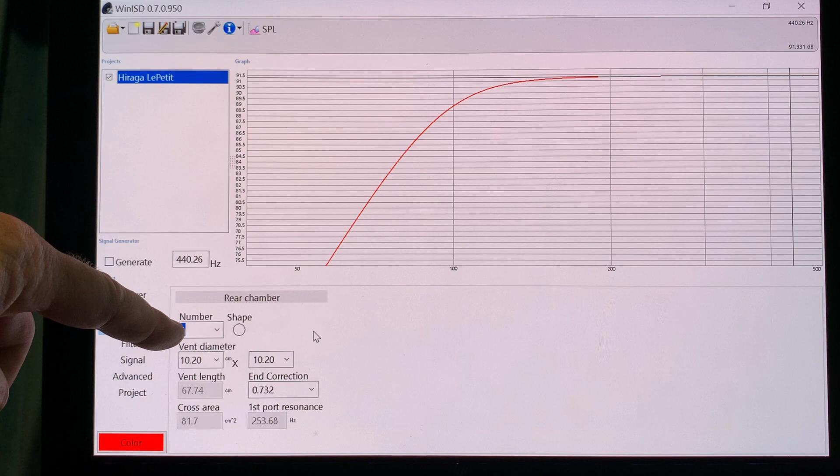Now, continuing, when you click on the Vents tab, here it tells you about the port. So you can give number of ports, so we have one port on the loudspeaker, but you can give 2, 3, 4 ports, and it will calculate the tuning frequency based on the number, shape, and size of the ports. So shape, we can change between square shape and round shape. If it's square shape, then you can design a slot port. It doesn't need to be a square. Much better if you flatten the square so it's a slot.

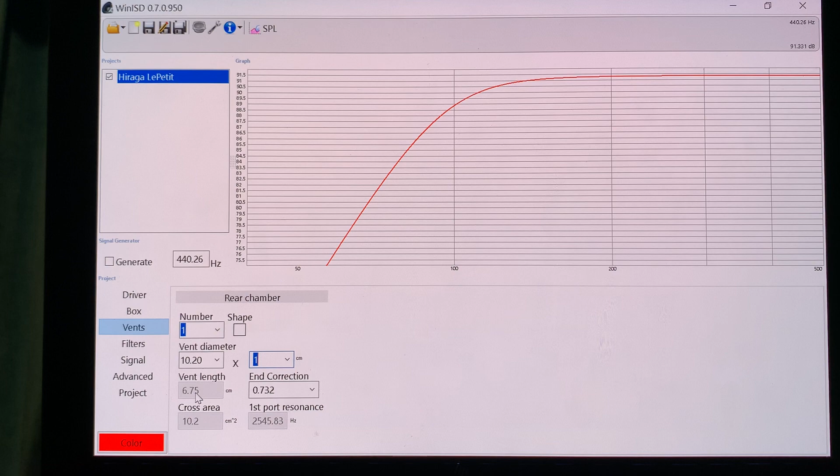And then you can design the slot by, let's say, 10 centimeters by 1 centimeter. And then if you have this big port, 10 by 1, then you need a 6.75 centimeter long port to have this type of tuning frequency. Let's go back to the box itself. So 4 liters, 89 Hertz tuning frequency.

So what happens with the output? That's at about 91 dB. If you click there, then it will show you what is the frequency. You can read the frequency there, 134 Hertz, and the output there is 90.916 dB. So we are dropping from 91.331 dB at 440 Hertz. So from there, we did a little dropping, and then it drops quite a bit more. So at 100 Hertz, we are already down to 88.8 dB.

So as you see, as we are getting closer to the tuning frequency, we are dropping more and more. Sometimes there's a glitch in WinISD, because this is the beta version of the software, and when this happens, you don't get the right frequency and dB values. It's just minus 0.9 Hertz and minus 1 dB, relative values compared to the previous position. It's kind of annoying, but it's very easy to fix. You just choose a different window, and then go back to the SPL tab, and now it's fixed. So there are some minor glitches. That's the price you pay, because this is just the free beta version.

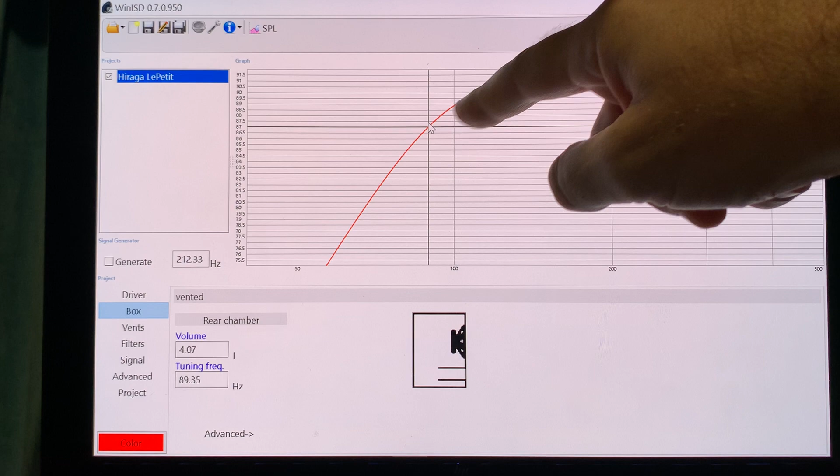So basically, when we look at 89 Hertz, it's 87 dB. So actually this is a little bit more than 3 dB loss, so the modeling doesn't give us exactly the minus 3 dB point, but something roughly that you can expect, and it can vary a little bit.

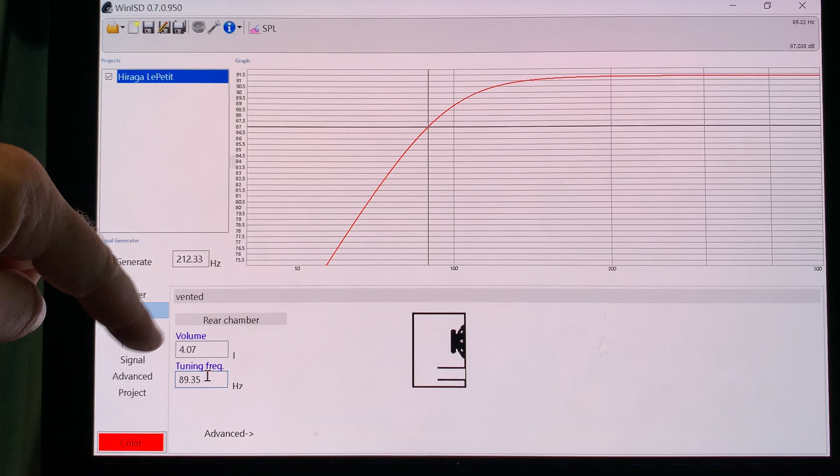So what if we change the tuning frequency? We can manually adjust here either the cabinet size, which is the free air volume. It's not the outside measurements of a cabinet. You have to take out all of the space that the wall itself occupies. That does not count into the volume. So the volume has to be the inside of the cabinet.

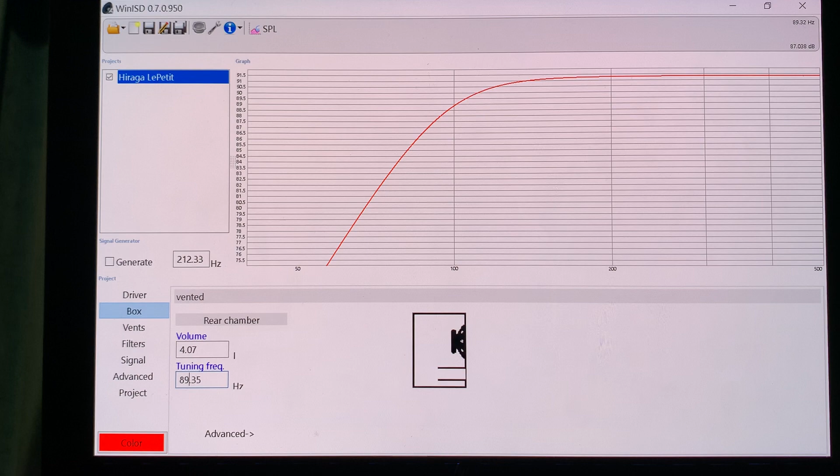That's the cats playing. And the tuning frequency, let's see if we change it from 90 Hertz down to 80 Hertz. How does it change? Then you see that it starts dropping sooner. But we cannot really see too much, can we? So let's just go back to 89 Hertz and make a copy from this. You can do copy project, and now it says copy.

And this copy, let's give it a different color. Let's make it blue. Okay. So now let's change the tuning frequency to 80 Hertz, and you see now that the blue line starts dropping earlier, but there's a point here. Let's click on it. And it's at 88 Hertz, where it starts to be on top of the red line.

So basically, if you have the same free air volume cabinet and you tune it to a lower frequency, it means that in the deeper bass you are going to get higher output for the low frequencies, but in the mid bass you are going to get a compromise. You are going to get lower output compared to the higher port tuning. And that's because of laws of physics.

Your driver puts out the same amount of energy regardless of where the port is tuned. The port tuning will change where that energy will be released, at which frequencies. So basically, if you tune the port to a higher frequency, then you will divert the energy towards the mid bass, and if you push the port tuning frequency lower, then you will divert the energy to the deep bass. So that's how the port tuning frequency choice weighs on you.

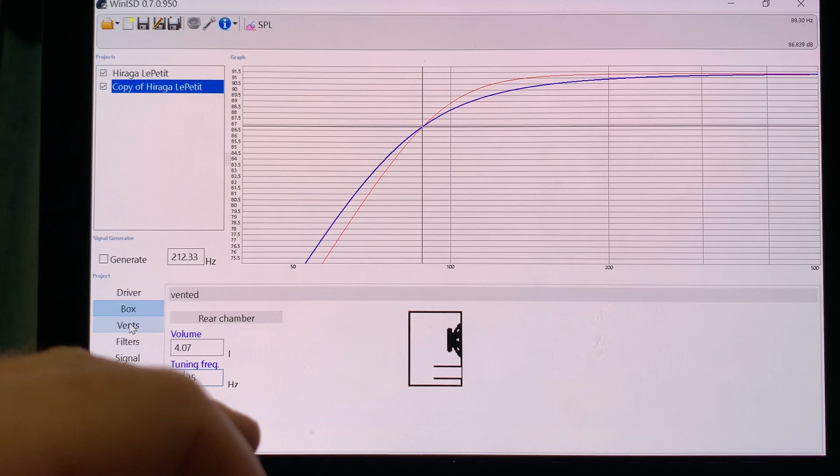And what else is going on? So now we tuned it almost 10 Hertz lower. What is the difference? Let's look at the vent, at the port. So you see now for that lower tuning frequency, we need a roughly 9 centimeter long port. And with the higher tuning version, we need a 6.75 centimeter long port. So as you see, the deeper you tune the cabinet, the longer port you need to achieve it.

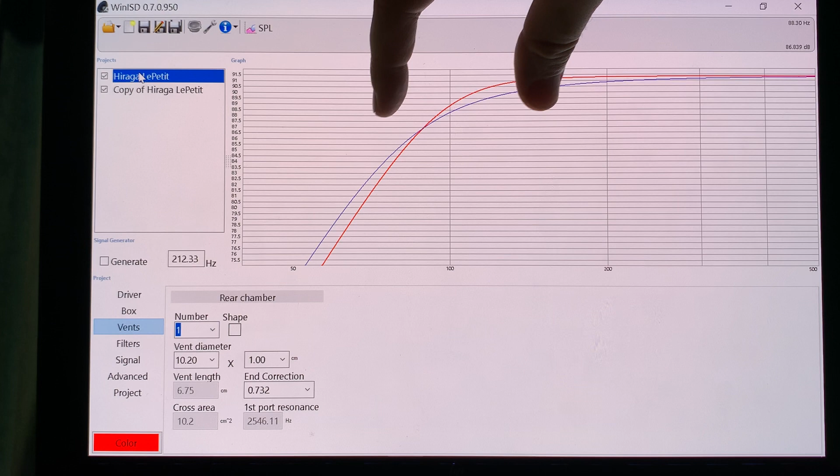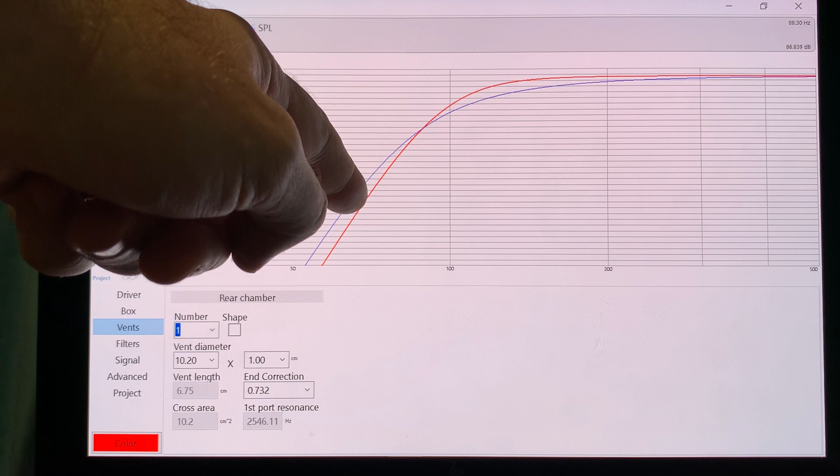However, what you have seen is that we have lost quite a bit from the mid. This is the mid bass, this region, and this is the upper bass. So top of the mid bass, upper bass, a little bit lossy. And really, we are not getting that much deep frequencies either. The whole thing just rolls off, and here it's a little bit less roll off than there, but not really enough to make a really big difference.

So what can we do about it if we want these tiny drivers to give us bass? Because right now, let's have a look at this point. So both of these drivers, when we look at 500 Hertz, it's a nice place to reference the loudspeaker output. We are getting almost 91, here you can watch, 91.3 dB output.

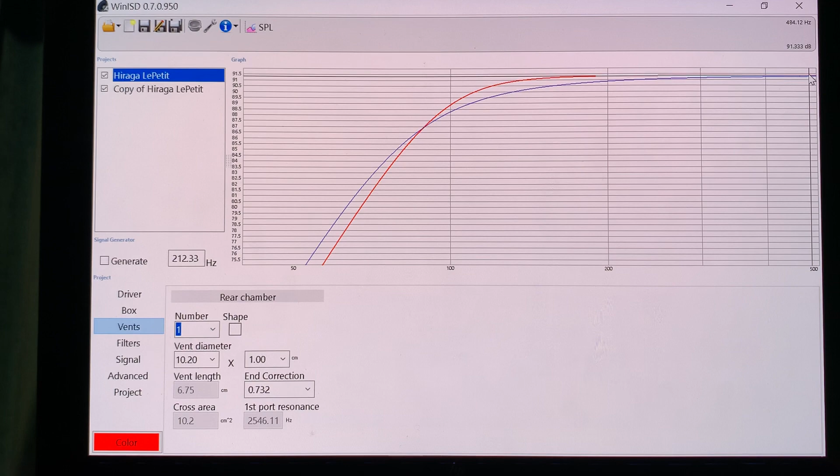Now let's look at the minus 3 dB point. So that would be 88.3 dB. Let's just go there, just click lower and lower. 88.4, 88.25. So roughly at 96 hertz. So at 96 hertz, we are 3 dB down with the 80 hertz tuned port.

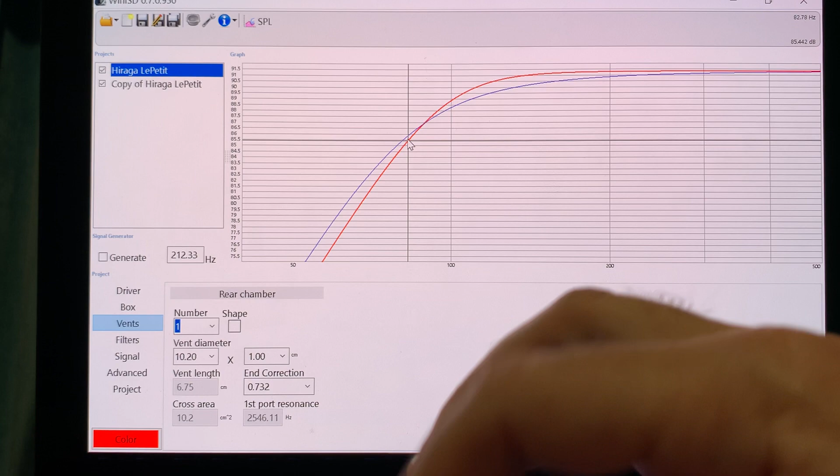And let's see where we are 6 dB down. So that would be 85.3 dB, roughly there. It's at 82 hertz. So basically this cabinet will give us a bass extension down to about 80 hertz. That's the minus 6 dB point. And below that it's not going to do too much because it just rolls off way too high.

When you have a bigger cabinet and the roll off is happening below 60 hertz or so, then you can even look at the minus 10 dB point. That's my generic point that I look at for useful bass output, at minus 10 dB, because your loudspeaker placement and your room are going to help out with the low frequencies enough that the minus 10 dB point will give you a working level in your room.

Of course, when you put it in an anechoic chamber, the minus 10 dB will leave you very much lacking at that frequency, but in your room it will play nicely. However, here we are too high in the frequency range, so here even the minus 6 dB will be very much noticeable because it just starts dropping way too early, way too soon.

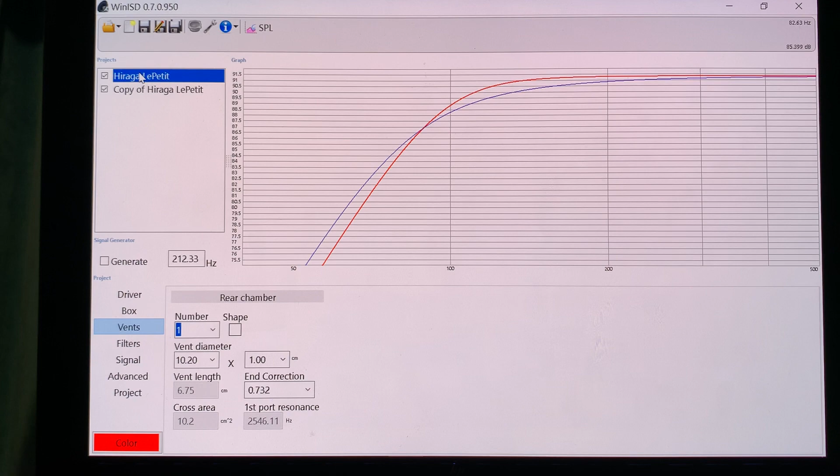So what can we do to improve this situation? Because as you see, when we started going lower with the port tuning, we are just losing mid bass, and we got a little bit. Now let's tune it maybe down to 60 hertz. What do we get? Oh, look at that. Here, this point, 84 dB, how many dBs down is that? That's like 7 dB down.

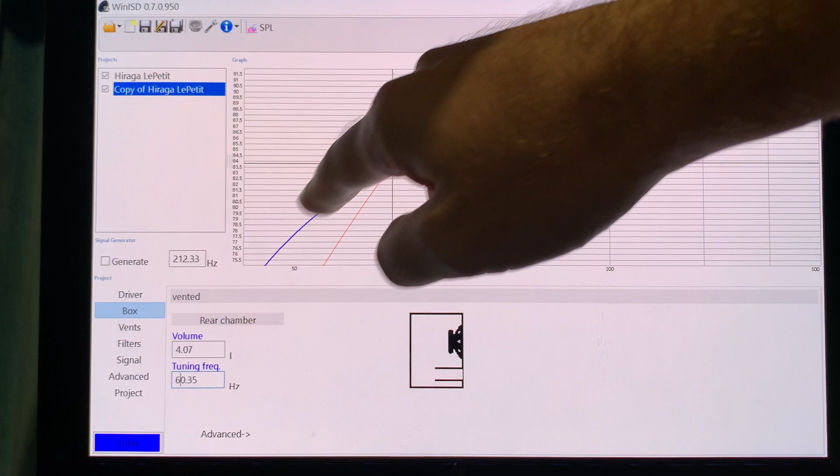That's when we start to see some gains there, but it's really kind of useless because it is just happening way too soon, way too high in the frequency range. But we have the whole mid bass missing basically. Just have a look here. 127 hertz, 88 dB versus 91 dB. So a 3 dB loss. That's quite a significant loss of mid bass.

So what can we do to change this situation? What we can do is, let's just go back to that 80 hertz setting, and we start increasing the cabinet size, and let's see what happens.

So instead of 4 liters, let's give it 10 liters. And now you see that we are starting to see something truly amazing. You see that there is still a drop in the mid bass, but instead of the whole thing starting to plummet like an axe into a lake, the response starts rising, and we are getting really serious bass output.

Now, if you put this into a small room, the smaller your room, the shorter the frequency of your room, and it is going to start the reinforcements already at higher frequencies. So basically, when you chuck your loudspeaker into a real world room, your room will start adding to the bass response at a frequency between 100 Hz and 200 Hz. If your room is a small room, that frequency is closer to 200 Hz.

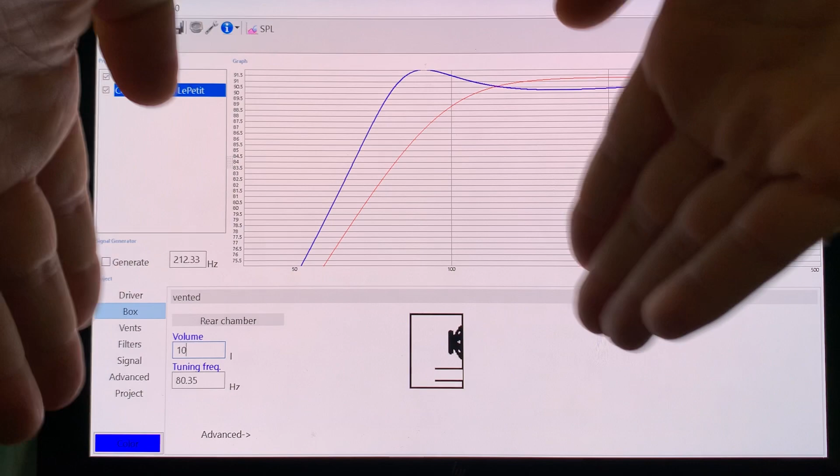And basically, just imagine that your room is like an aquarium. You have your aquarium here, and you start sloshing the water in your aquarium. And if it's a smaller aquarium, meaning a smaller room, then the waves that start sloshing are shorter waves. So the slosh is at higher frequency, and when you have a bigger aquarium, like having a bigger room, those high frequencies don't get excited anymore, and you will have longer waves forming in the room. The same thing happens with the air as it would with water in a pool.

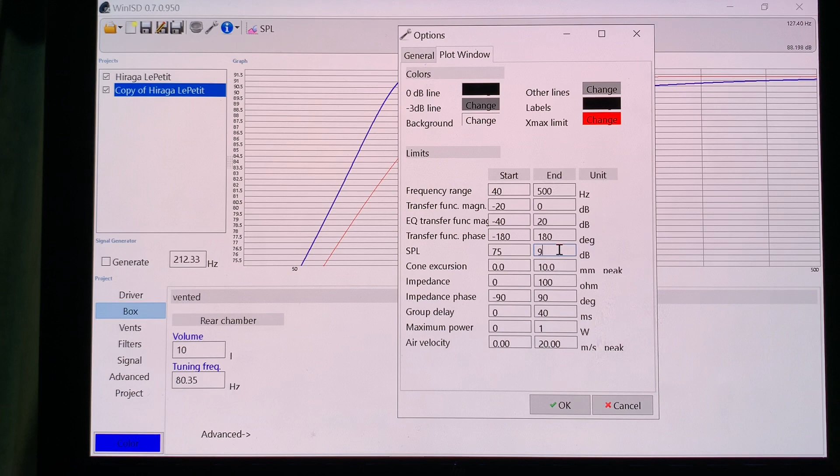So coming here, you see that there's a really big rise here. It's getting off the graph. So let's just adjust it. Let's go to our toolbar and increase the SPL from 92 dB to 95, so we can see where it goes. There you go. Now the whole thing fits in here, and it rises to 92 dB. So actually the raw output of the loudspeaker cabinet in this region, which is at 87 Hertz, will be higher than the peak output of the loudspeaker in higher ranges.

So basically, this will give you a loudspeaker that has a tremendous, well, not tremendous, but a significant mid-bass hump. So everything that has mid-bass in it, like a bass guitar, will have a big body to it, and will be really prominent in the sound. Or if you have a basso singing, then he will overshadow a tenor or an alto female singing. The bassos will be more prominent.

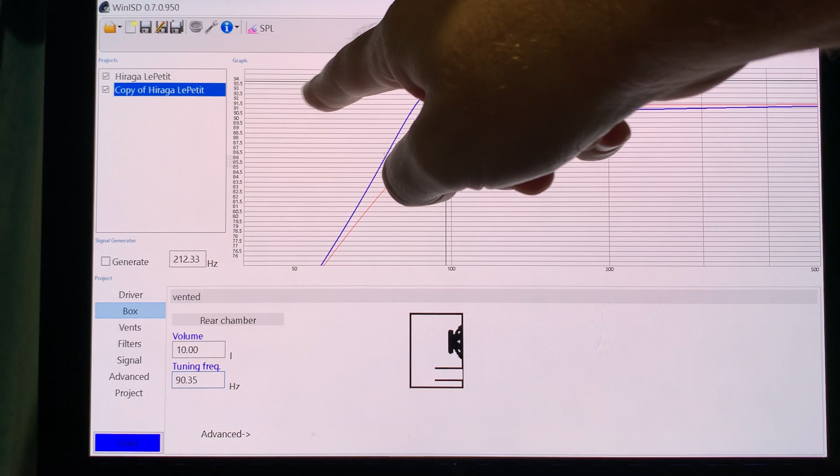However, what you can also do when you see this hump coming up: if we tune the frequency higher, then this hump will be bigger. So if we tune it to 90 Hertz, you see the hump is even bigger, goes much higher than before. It was 92 dB before, now it's almost 94 dB. It got 2 dB taller, and it crept a little bit more towards the higher frequencies. So it's even more boomy than before, but it starts rolling off even faster.

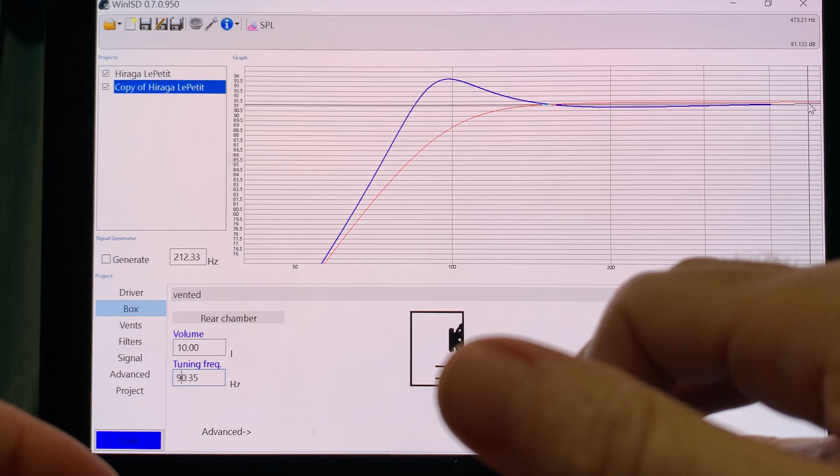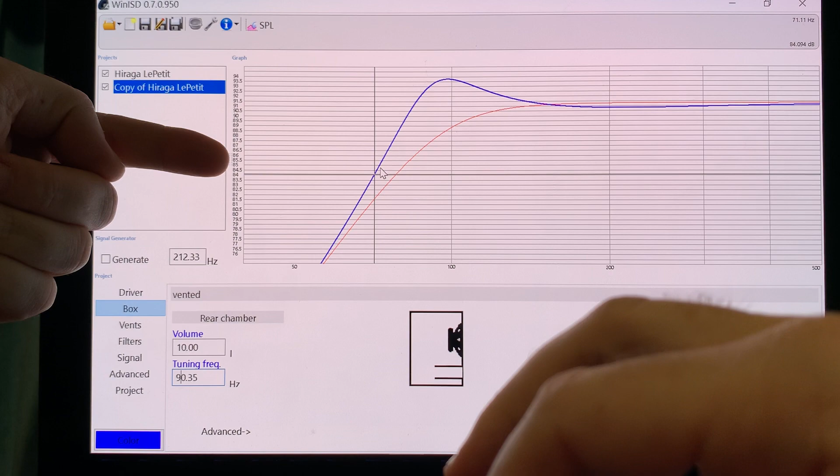So where do we get the minus 6 dB point? Here we were at 91 dB, so 85 dB. Let's see, we are looking at 85 dB, clicking on the blue line, and you see that I click on it here, and it intersects the 85 dB line, and I read the frequency. There it is, 72.5 Hertz. So 72.5 Hertz is the minus 6 dB point for this loudspeaker cabinet.

So it means that basically this will be good to about 65, 70 Hertz. And it will be really mid-bass heavy, but below 70 Hertz, you will miss the bottom octave of the bass guitar and every bass instrument, but the higher range of the bass guitar will be super prominent and dominating the sound. So let's just go the other way, and instead of increasing, let's decrease the tuning frequency. So now we tune it to 70 Hertz.

Now we are getting somewhere. And as you see, we are getting roughly a straight line. There's a little bit of a valley there, but the energy of the driver does not just fizzle out, it just gains energy before

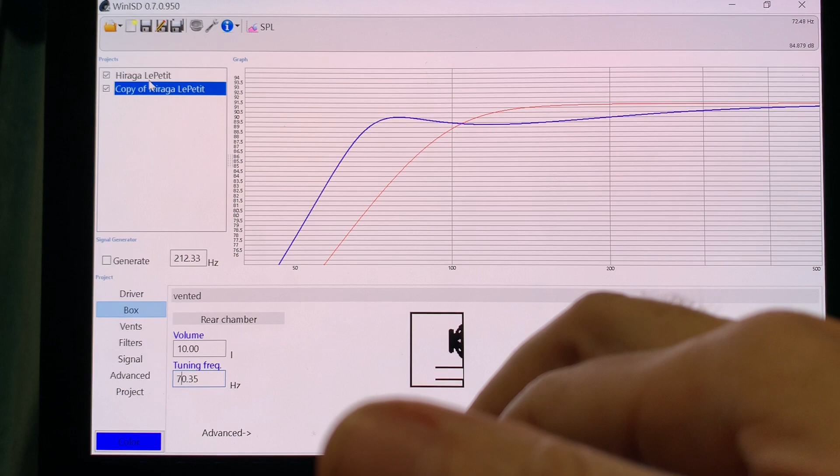rolling off. So now what you see compared to the previous version, which was the one recommended by the software, 4 liters tuned to roughly 90 hertz, it starts basically rolling off from here, about 130 hertz. Below that you will start noticing with your ear that we are starting to lose the bass. So basically if you have the basso, then the basso will be losing his voice compared to your tenor and compared to your altos.

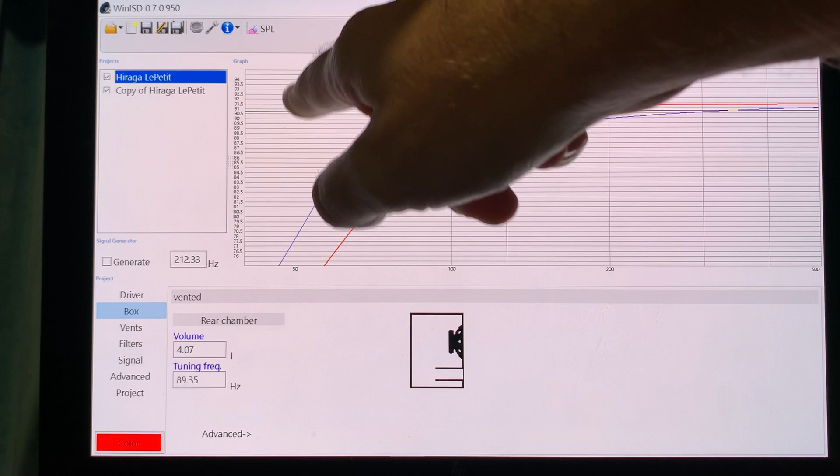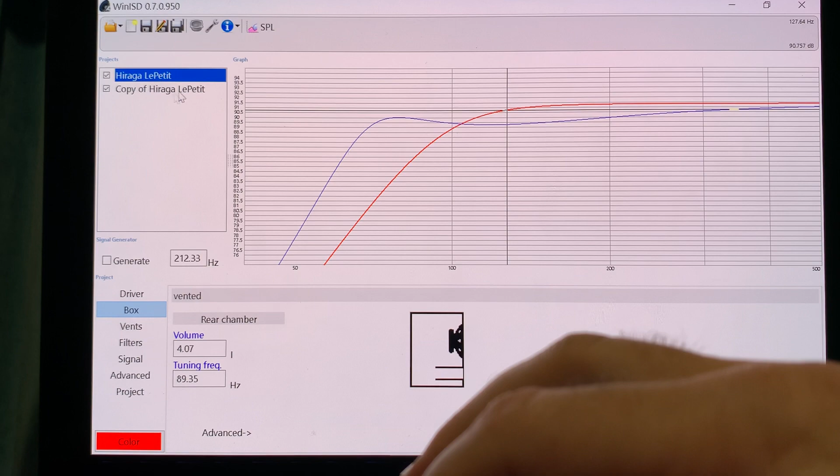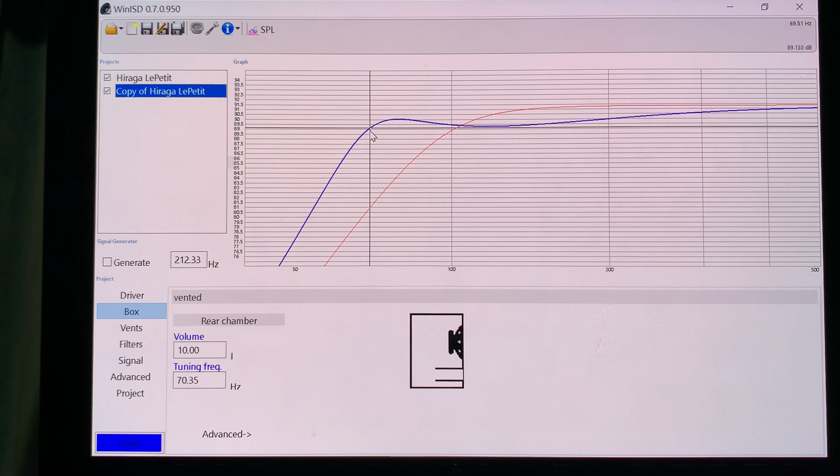However, in the case of the higher volume, we a little bit more than doubled from 4 liter to 10 liter volume. We are still talking about baby loudspeaker size. In that case, we start to lose the energy at about this point, 70 hertz. So instead of 127 hertz, we extend it to 70 hertz. So we almost added an extra octave to the useful bass response of this cabinet using the exact same driver, just by doubling the volume of the cabinet and tuning it to a lower frequency.

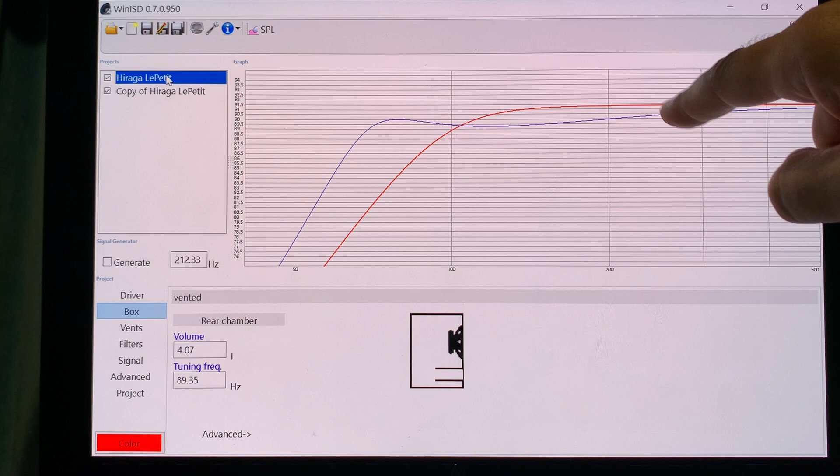So when you read about loudspeakers, that's why size matters, cabinet size matters. And even if you have a tiny driver, it's the cabinet size that will impact entirely the bass response of the cabinet. And of course, there is no cheating the laws of physics. And as you see, the smaller cabinet with the higher tuning has higher response here in the higher mid bass, upper bass than the bigger cabinet. And it's because it's a smaller cabinet, it's tuned to a higher frequency, so it sings more in the higher frequency region.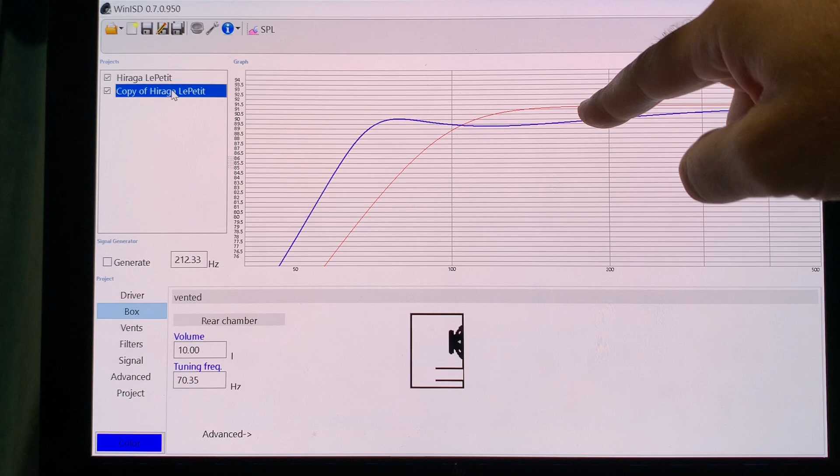And what's the difference between them? The difference is the room selection. So basically, here you see that the bigger cabinet is already dropping a few dBs in the mid bass. And how can you use that to your advantage instead of treating it as a deficiency compared to the smaller cabinet? You can use it to your advantage by choosing a small size room. Because in a small size room below 200 hertz, your room is going to boost the output that you hear as the total response in your room.

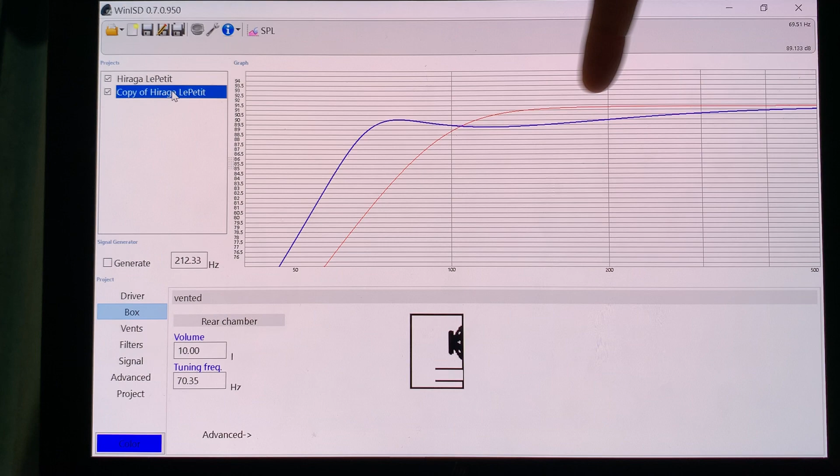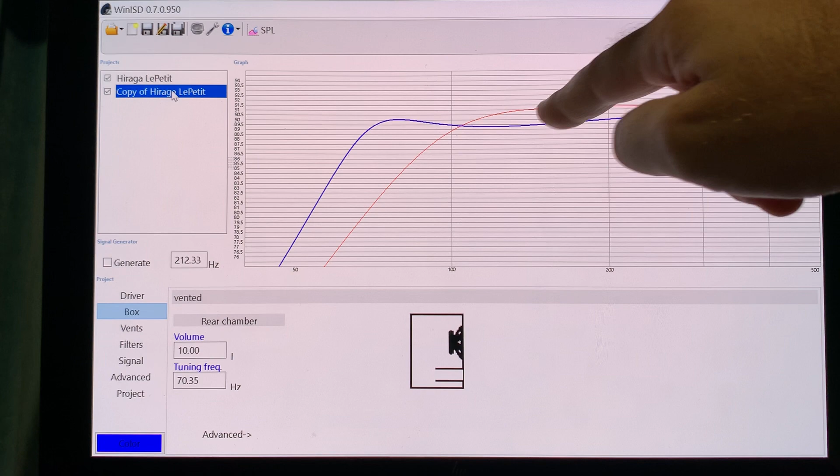And even though the speaker's output drops, because your room is adding more energy to it, keeping that energy inside, the actual response in your room is going to flatten out. And you are not going to notice a drop, you are going to notice that the energy is even. So basically, if you have this tiny, smaller version cabinet, you want to put this into a larger room. If you put it into a small room, it will sound boomy. You will have too much upper mid bass, too much lower upper bass, and you won't have any deep bass whatsoever. So don't just think that the smaller cabinets are really good because you have a lot of mid bass, but you will have a relatively overblown mid bass in the small room and zero deep bass.

And the bigger cabinet actually will work better in a small room than a teeny weeny cabinet. So you see, this is a little bit of a counterintuitive thing. You would expect that the smaller your room, the smaller your cabinet size needs to be. And this shows the exact opposite. Well, within reason, a relatively smaller room can use a smaller size cabinet, but I'm not thinking about like 5 liter versus 10 liter, but maybe a 500 liter cabinet would be way too overblown for your room, that's for sure.

On that scale, it really makes sense to choose smaller size speakers for a smaller room. But within that size selection, if you go for a bigger cabinet for the same driver, then it will work better in a smaller room compared to the smaller cabinet size using the same driver.